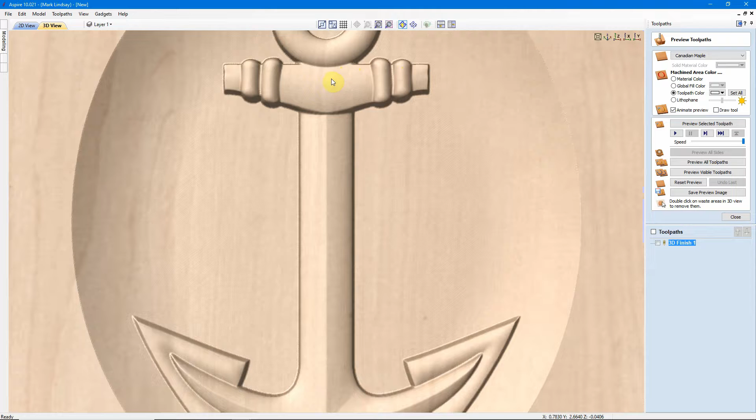Rest machining is a way to carve a 3D file more efficiently. If we look at an example I have here, this boat anchor carved in a dish, to get all these fine details in here and on the inside of the circle and down where this part meets down here, you need a pretty fine bit. But if you go into this with a real tiny bit, carving these large details like this dish or the surfaces of the anchor could take a long time to run.

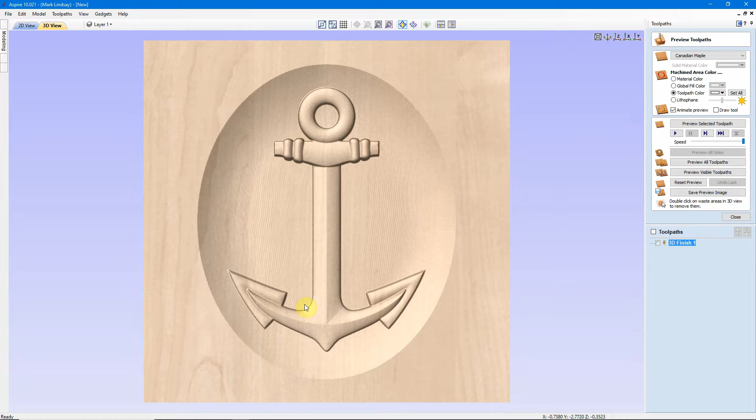So rest machining is a way of using a finishing toolpath to carve the large details, then coming along with a smaller bit and just getting the finer details. So let me go ahead and go into a new session of Aspire, and I'll demonstrate the technique.

Well, first we're going to need a 3D model. So I'll come over here to the Clip Art tab, and I've gone into the Clip Art folder, and this is the model we're going to be carving right here. It's this anchor in a dish. So I'll double click that to put one out here in the center of my material.

Then I'm going to go into my Modeling tab. What I'm going to do is resize this model. We'll make sure Link XY is checked, and I'm going to go for a height of 10.5 inches. We'll click Apply.

I'll close it, and then with it still selected, I'm going to go ahead and put a vector boundary around the component to be used as a profile cutout. So, pretty straightforward so far.

Let me just go into my properties to see what the model height is, and it's 0.3525. We're using 3/4 inch material, so we're fine there. I'll go ahead and close this.

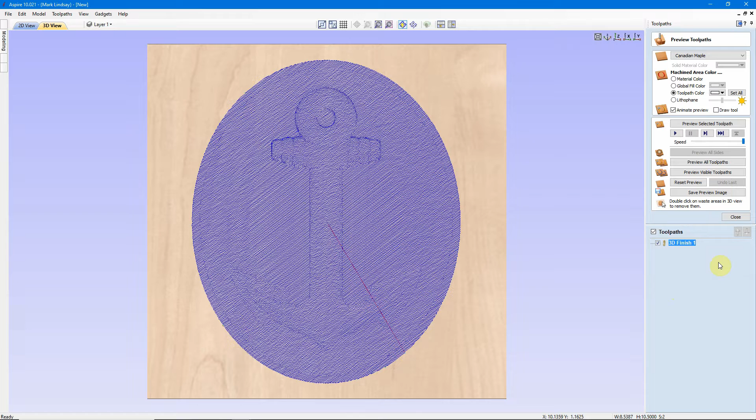With that toolpath calculated, we'll go ahead and preview it. And with our preview completed for this toolpath, we see some of the problems that we're going to clean up using rest machining.

Now, the main reason in using that large 1/4-inch bit was to be able to get this dish hogged out and get the basic outline of this anchor, all of these top surfaces carved, in a speedy manner. We don't want to spend all day long carving on this. Now, however, we have all of these milling and machining marks left over by that 1/4-inch bit where it was just too big to get down in there and get real close.

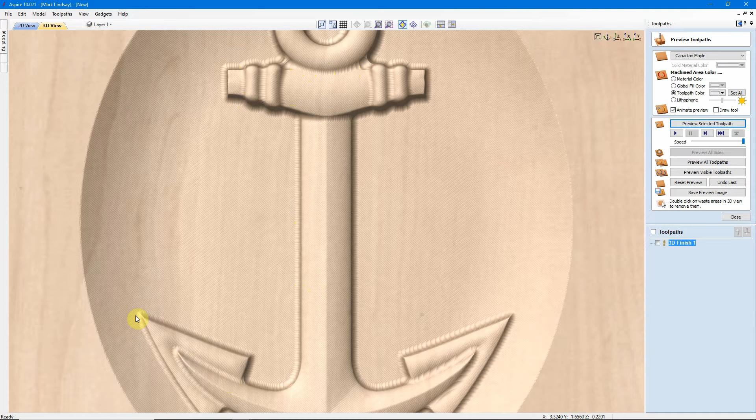And this is where rest machining comes in. We want to calculate a toolpath that's just going to focus on these areas and not recut the whole thing with my smaller tapered ball nose bit.

So what we'll do from here without touching anything else is I'm going to go up to the Model menu up here in my menu bar, click, and go down here to Create Component From. And if we look down here on the bottom, we see Create Component From Toolpath Preview.

This is the tool that's in Aspire only. This tool is not available in VCarve.

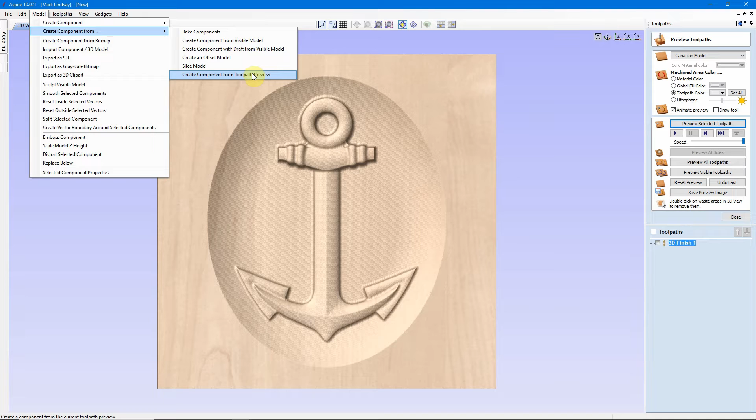There are two crucial things you need to remember when using this technique. The first is, before you click on this selection in the submenu, hold down the Control key. So I'm holding Control on my keyboard and clicking Create Component from Toolpath Preview.

You may have seen a little blue bar suddenly jump up down below, and from all outward appearances it doesn't look like anything has happened. From here, I'm going to close the preview. We'll go back over to the Modeling tab, and we see Toolpath Preview has been added to our component tree.

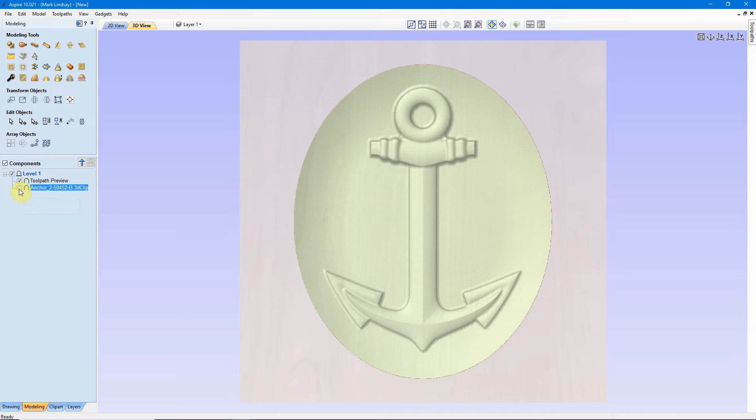Now I'm going to turn off the anchor 3D clip down here so you can see that is the component created. When I zoom in, you can see all of the material left behind by that 1/4-inch bit is raised in this component.

From here, we're going to go back into a straight Z view. I'm going to use the bitmap trace function over here in my drawing tab to trace around these sections so that we can machine them away.

Now, I mentioned a couple of crucial points. One was holding down the Control key up here in the model menu. The other is we need to pay attention to our check marks over here. Right now I have the anchor turned off so that the only thing being displayed is the toolpath preview. We'll be revisiting this in a few minutes, but make sure you have your anchor turned off at this point.

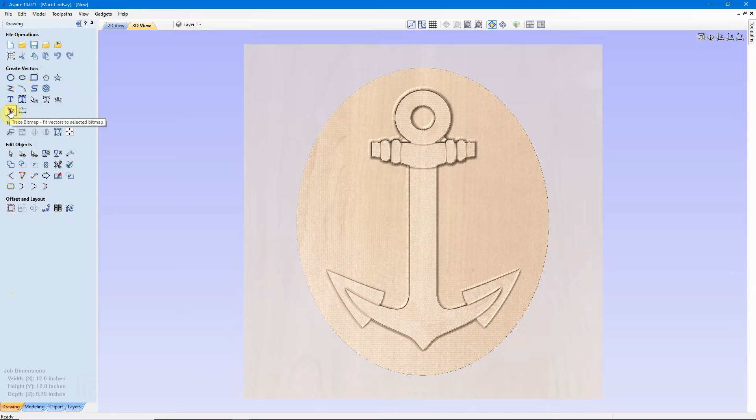So we'll go over to the Drawing tab, and I'm going to go into Trace Bitmap. We'll go back into the 2D view and look at our bitmap here. Select the bitmap, and we see it goes bright gray.

I want to make sure I'm in black and white over here, and I want to bring my threshold down for the number of colors here. You'll see what happens is that anchor will start to appear.

Right now I'm dragging with my mouse, but I'm going to let go and instead use my cursor arrow keys on the keyboard. So I'm using cursor left at the moment, and I'm paying attention to how much detail we have.

I went too far. You saw how that went white, and I have a little bit of shading on the anchor. I'll bring that back up. So we're at 0.06.

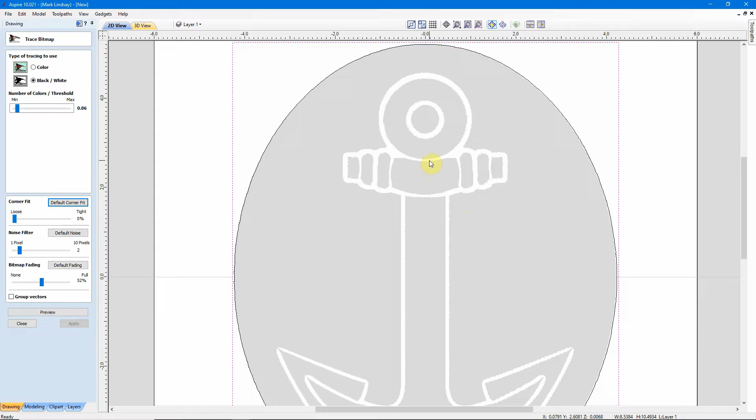I'm going to go ahead and use that to trace my bitmap to get all of this included in the tracing. For my corner fit, I'm going 0% loose. I want that all the way to the left because I don't want the blockiness that this is going to create. It's still going to be kind of blocky, but I'd rather have smooth corners here.

For the noise filter, I'm going to bring my noise filter all the way up. I don't need any areas less than 10 pixels. I'm going to leave the bitmap fading alone, and I'm going to preview.

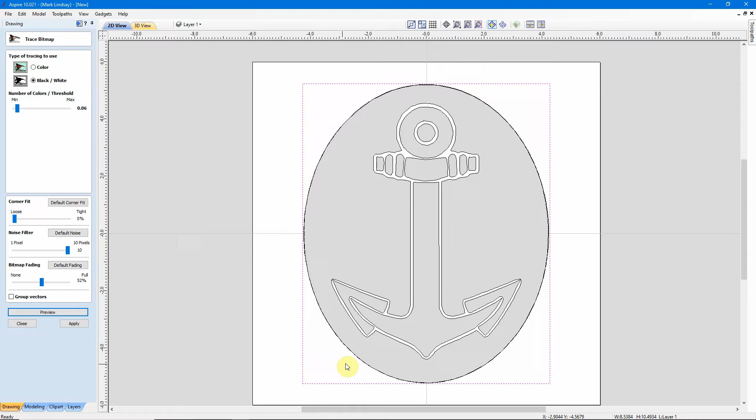Then I'll come in here and look, and I see I don't quite have enough down here on these ends. So I'll come back up into my threshold and bring it down. Let's see, bring it back down. Yeah, I can't go any farther down than 6. We're just going to have to work with it.

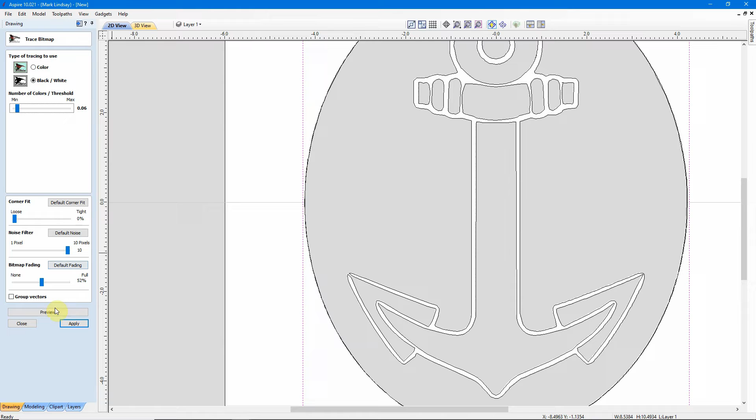I'll work on these vectors in the editing phase. So we'll go ahead and click Apply. Then we'll close this. Now I want to select these vectors and edit them.

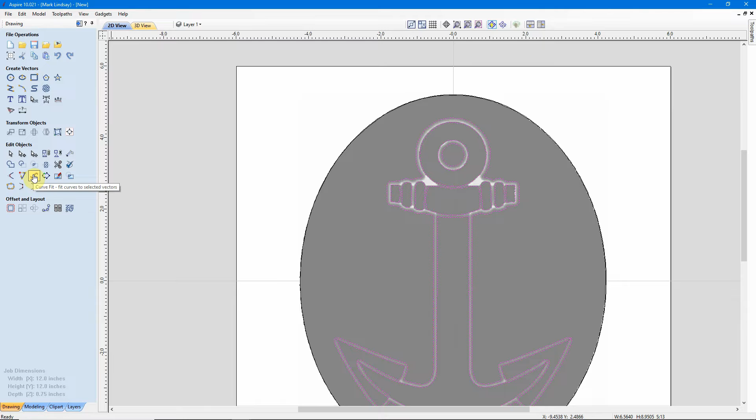So the first thing I'm going to do to get rid of some of this blockiness that we have in here, I'm going to go ahead and click on Fit Curves to Selected Vectors. I'll click on that, and we see all of the points that make up these vectors. Now I'm going to bring my tolerance to about

0.03. I want to try Bezier curves.

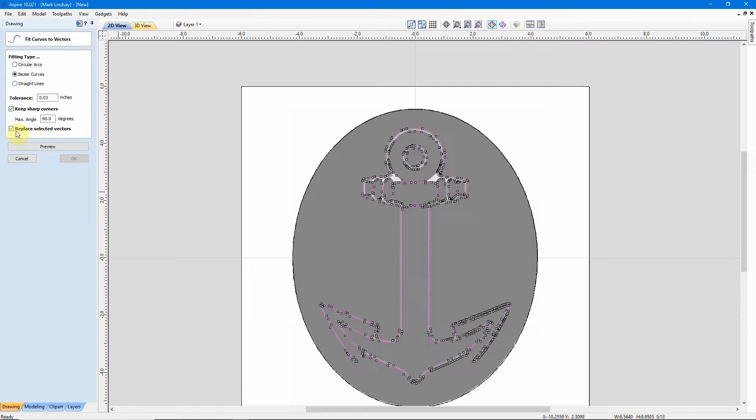I do want to keep sharp corners, and I want to replace the selected vectors. I'll click on Preview, and that simplified those vectors big time. I'll click OK to get out of that.

Now I'm going to come down to the Modeling tab once again, and we're going to turn on the anchor and switch off the toolpath preview. So all I should have out here now is my main component. Now I want to zoom in down here where we have these two separate vectors.

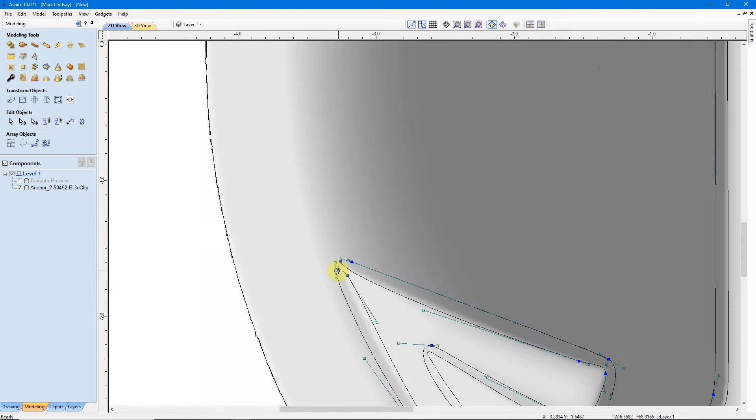I want to join these. I don't want this to have a missing gap here. So I'll click off, select the vector, and type N to go into node editing. Let's see what I want to do here.

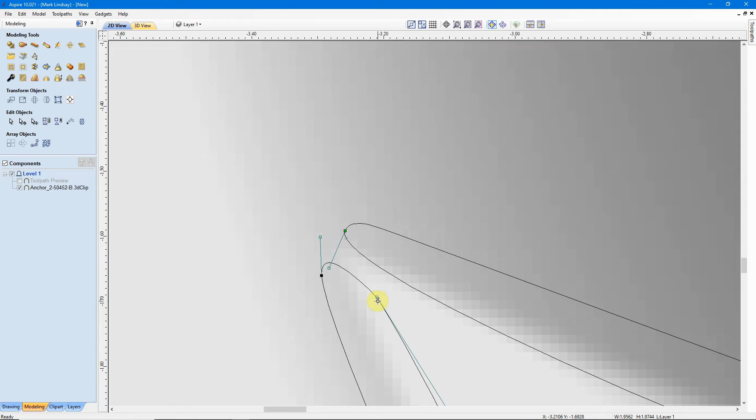I want to cut this vector right here, so I'll put my cursor over this and cut vector. Put my cursor here, cut vector. Now I want to cut this vector here, so I'll zoom in a little bit, put my cursor over it, cut vector. Now right here, I want to add a point, so I'll insert a point, then I'll cut the vector.

So I should have this vector here as a separate piece, and I have this vector here as a separate piece. Now I'm going to delete these separate pieces. Just click on it, tap the delete key. Same here, click on it, tap the delete key.

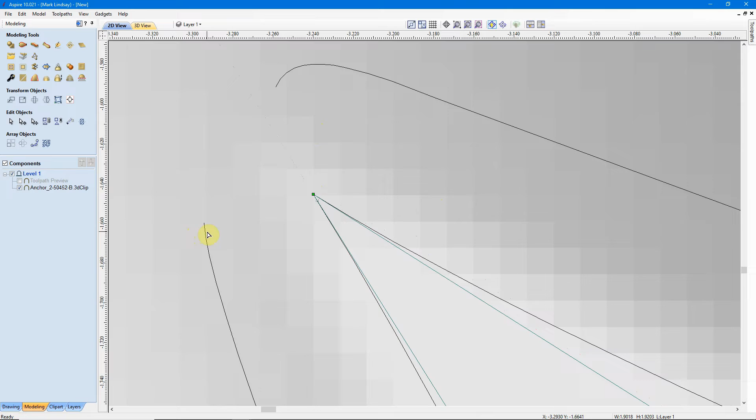Now I'm going to click on this vector here, and I'm going to drag this out to this point. And the same here. Now I'll click on this vector. I'm going to drag that up, drag this up, kind of turn this around a little bit, and bring these two to meet one another right there. It doesn't have to be beautiful.

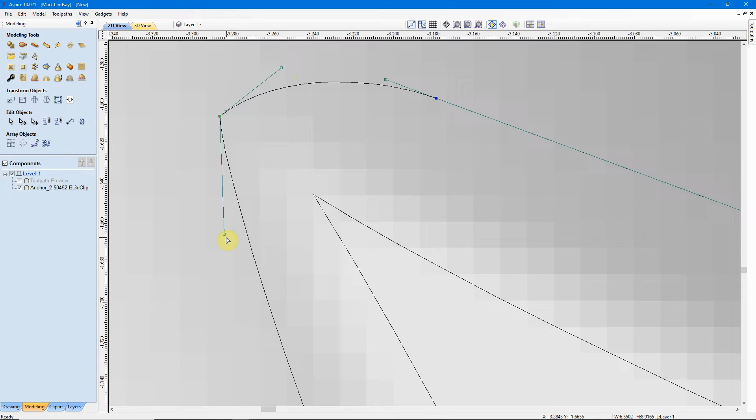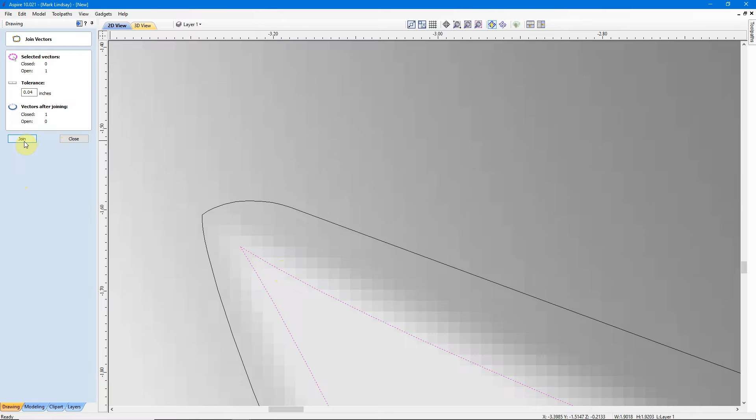Now I can tap the letter N to come out of node editing. And with this selected, I'll go back into my drawing tab and join that vector. Then I'll select this one here, and join that vector. Close. And that's taking care of that.

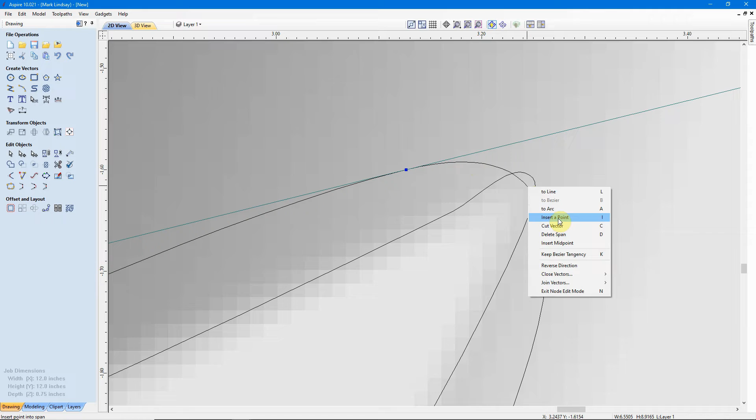This here, I can fix by selecting this one. Go into node editing. I'm going to insert a point, and I'm just going to drag it out beyond this one. So a little bit of creative editing, and we've got it covered.

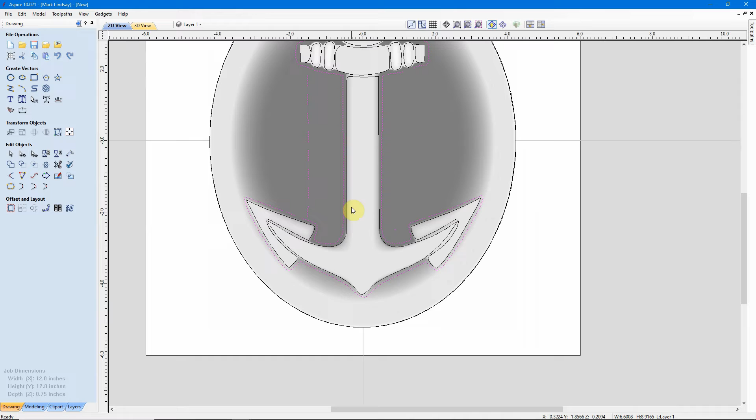Let me kind of straighten that out. There we go, that looks a little better. Tap the letter N to come out of node editing. Now, you won't always have to do something like that. Usually they will join up, depending upon the artwork.

But now we have all of our vectors that surround our anchor. So I'll click off to deselect what I had selected. Now I'm going to come back in and select all of those vectors that surround the model. I'm not selecting either of these ovals out here.

Now I'm going to do one last sanity check before I calculate this toolpath. I'm going to make sure my toolpath preview is turned off, and my main component, in this case the anchor, is turned on. Now I'm going to come back over into my Toolpaths tab, and with those vectors selected, I'm going to do a 3D finishing toolpath.

I'll click on 3D finishing, select my bit. I'm going to go with a 1/16 inch tapered ball nose. I'll select that. My machining limit boundary is going to be the selected vectors, these right here. My boundary offset, I'm going to change to the diameter of my bit, which will be 0.0625.

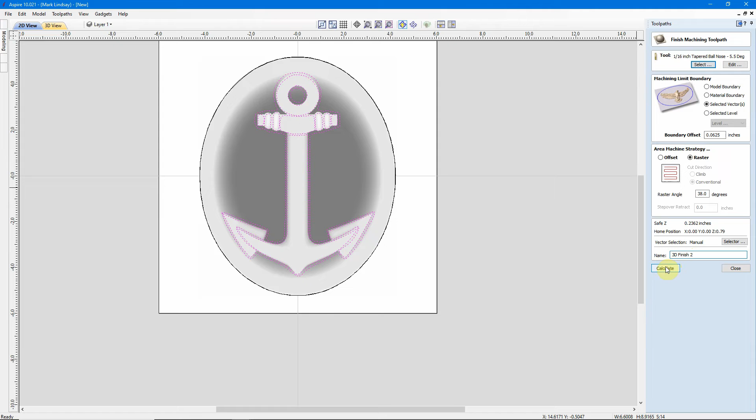I'm not going to change anything else, and I'll call this 3D Finish 2, and we'll calculate that toolpath. And we see now the toolpath that this is going to carve right inside of that traced bitmap.

I'll go ahead and preview this toolpath. And we see, when we zoom in, that that small bit came up and cleaned up these fine details up in here and in through here, inside this circle, and on the outside circle here.

Now, there are pros and cons to using this method. Some of you may be asking, why go through that extra work when you could just as easily do a single toolpath and carve it with that 1/16 inch bit and be done with it. The number one advantage in this technique is the time savings.

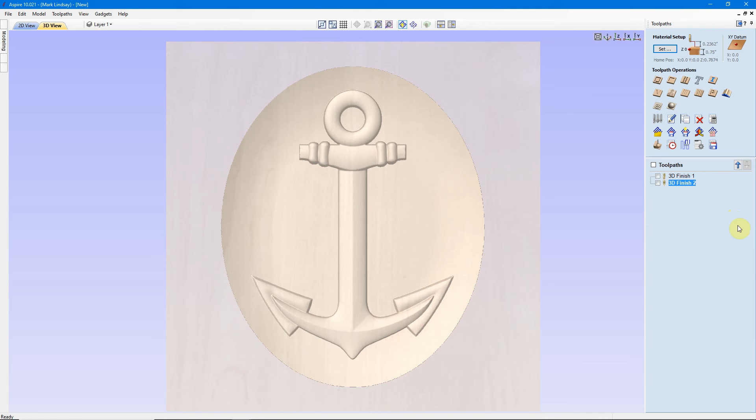I'm going to close my preview and check the toolpaths here. Then I'm going to go over to my example that I showed you earlier. This example was carved using one 3D finishing toolpath using that 1/16 of an inch tapered ball nose. So the entire model was cut with that 1/16 inch ball nose bit.

I'm going to close this, check the toolpath, and we're going to go up here to Toolpath Summary. We're going to see that this model would take 5 hours and 20 minutes to cut using that one bit. 5 hours and 20 minutes.

Let's go down here to the rest machining example, and with both toolpaths checked, I'll go into Toolpath Summary — 2 hours and 13 minutes, so less than half the time, by allowing that 1/4 inch bit to do most of the work, and then just using that 1/16 inch bit to tidy up the details. That is the main advantage — less than half the time to carve this one than it took to carve this one.

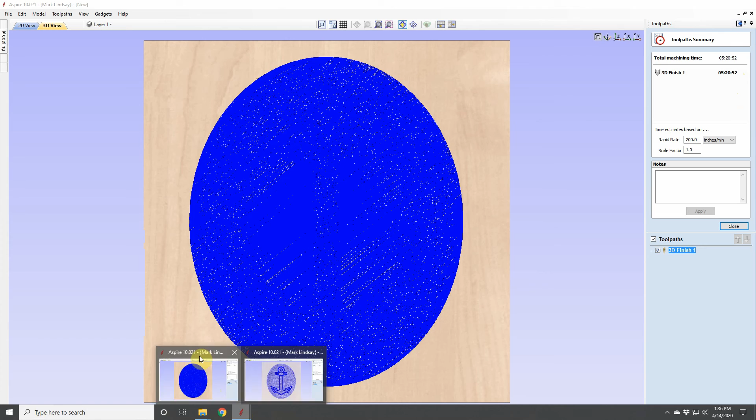Now, I said there's pros and cons to using it. Let me come out of my summary, uncheck the toolpaths, and go back into my preview. The one disadvantage to using this is, because of the step over of this bit, the 16th inch bit step over is very tiny, so you will notice a difference right here where that 16th of an inch bit did its machining versus out here where the 1/4 inch bit did its machining. You will have this seam around here.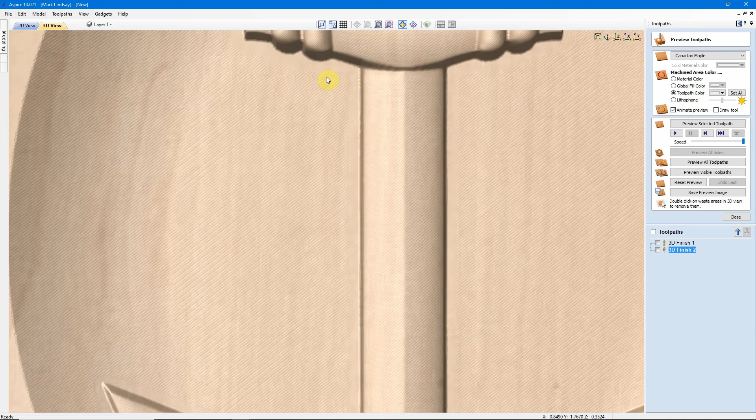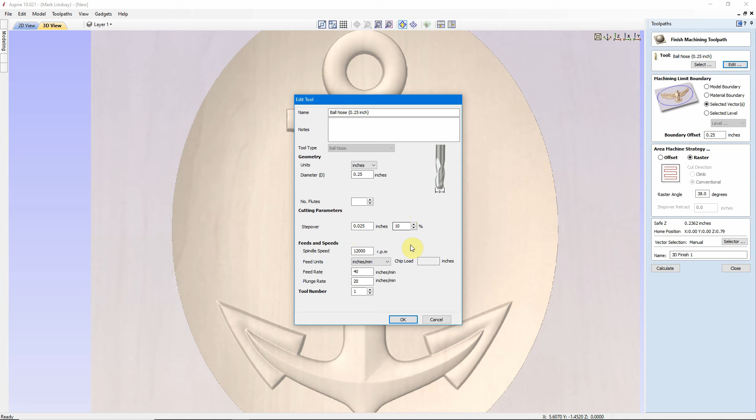Now that can be handled in a couple of ways. You can tighten up the step over on your large bit. In fact, let me look at it and see what my step over is. Okay, my step over is set for 10%. I could bring that down to 7 or 8%. It would add a little bit of time to this toolpath.

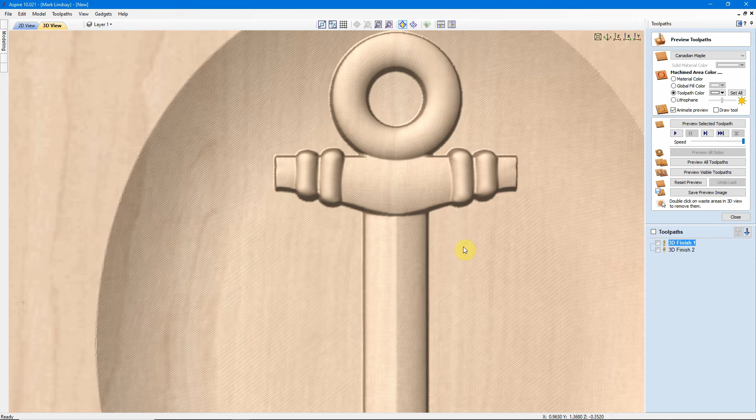Or you could work on your sanding and know that you're going to have to sand this final piece. Personally, if you've been following me for a while, you know that I use nylon sanding brushes, and I use the Scotch-Brite radial sanding discs, and I'll put links in the description to the sanding products that I do use, so that you can take a look at what I have or what I use and comparison shop from there. But from a machining time standpoint, the rest machining technique is a major advantage over the standard 3D carving techniques.

Let me close this here and go back over into my drawing tab. The crucial things to remember are: when you come up into the modeling tab, create component from the toolpath preview, before you click this menu option, hold down the control key. The other crucial thing to remember is when you go over to calculate your second toolpath, make sure you have toolpath preview turned off and your main component turned on.